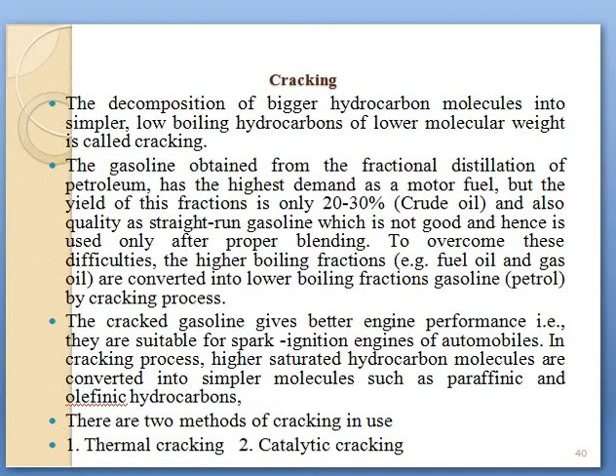So the first one is the thermal cracking. In this process, the heavy oil is subjected to high temperature and pressure. So thermal, high temperature and pressure. The bigger hydrocarbon molecules break down to give smaller molecules of the paraffins, olefins and hydrogen. So bigger groups are giving smaller groups like the paraffins, olefins and lower groups. The cracked products are then separated by fractional distillation.

So the cracked products, whatever you are going to do in the distillation tower, or we call it a bubble tower, or any other means, flashing or anything, we are going to do the distillation. This process is carried out in liquid phase at a temperature of 475 to 530 degrees Celsius, and the pressure is around 100 kg per centimeter square.

This process, where the temperature and pressure are maintained like this, is called liquid phase thermal cracking. When it is done at a higher temperature, 600 to 650, and under a low pressure of 10 to 20 kg per centimeter square, that is called vapor phase thermal cracking. In the first and second, the temperature and pressure vary. In the liquid phase the temperature is less and pressure is more, whereas in the vapor phase the temperature is high and the pressure is low.

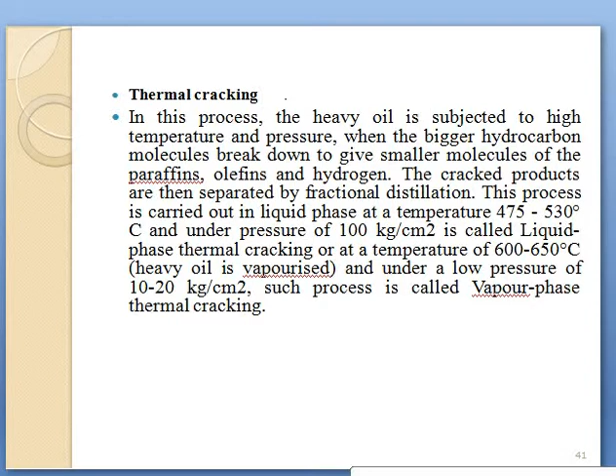So whatever oil you want to crack, we are going to maintain it at high temperature and pressure so that the molecules are broken down. So you are going to heat the feed initially, the heavy oil. You heat it and then it is sent into that column, like our distillation column; we can also call it a fractionator. You are going to fraction pirikka porom tani.

And then you can see that the residue, the heavier things, will be coming down, and the lighter ones, gasoline, will be going to the top. So we can separate each product depending on their density. The residues will be collected at the bottom, and once again from this fractionator we are going to separate them and take out the still lighter gas oil. So in this way we can collect each one as a different fraction.

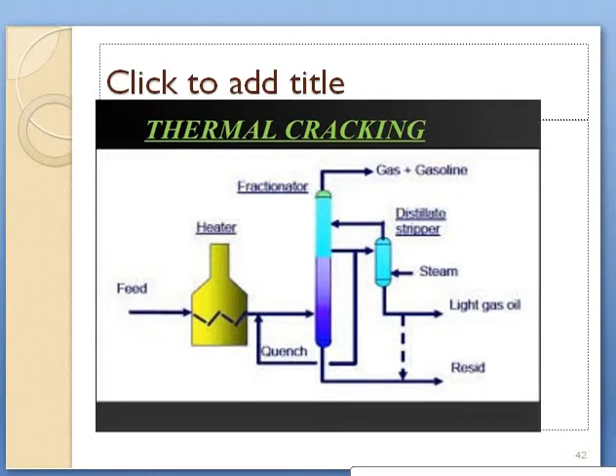So quenching is for that cooling purpose. So thermal cracking, just high heat and pressure will be applied. So next, coming into

catalytic cracking. From the word itself, you can easily understand that in catalytic cracking we are going to make use of some catalyst. In this process, cracking is carried out in the presence of a catalyst at low temperature, around 300 to 450 degrees Celsius, and pressure is very low, only around 1 to 5 kg per centimeter square. The catalyst like aluminum silicate, Al2(SiO3), or alumina used in the cracking gives higher yield and better quality of gasoline.

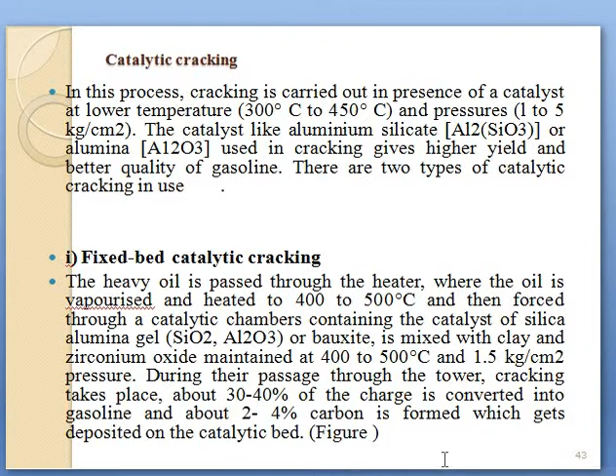So first you are going to get the gasoline, and then we will also have the deposits that are going to be formed, but its content is very less, only 2 to 4%. So cracking takes place, 30 to 40% is converted into gasoline, and 2 to 4% carbon is formed, which will get deposited on the catalytic bed itself. The vapors produced are then passed through the fractionating column.

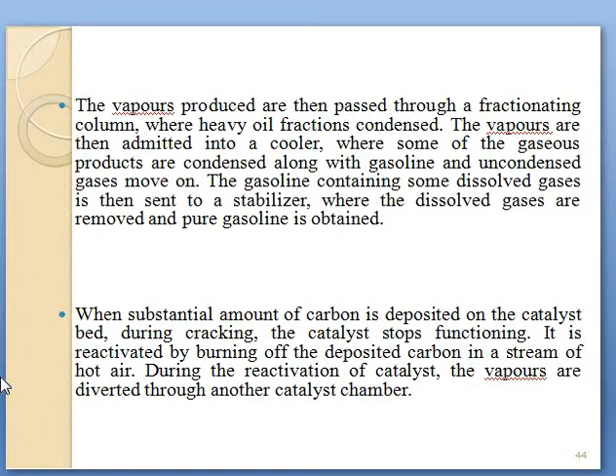It is reactivated by burning off the deposited carbon in a stream of hot air. So you are going to strip it off. If we pass hot air again, you can remove the carbon. So you are going to reactivate the catalyst. During the reactivation of catalyst, the vapors are diverted through another catalyst chamber.

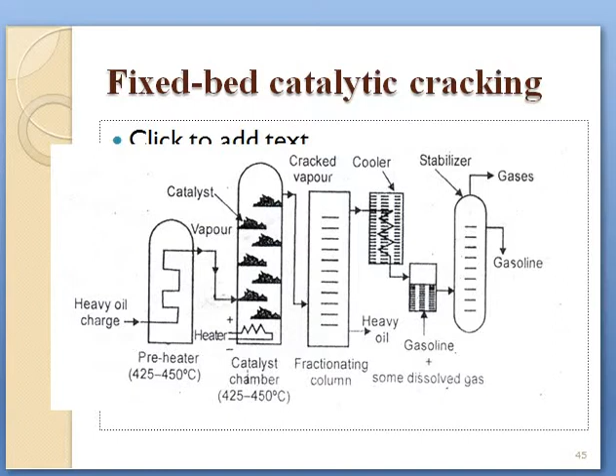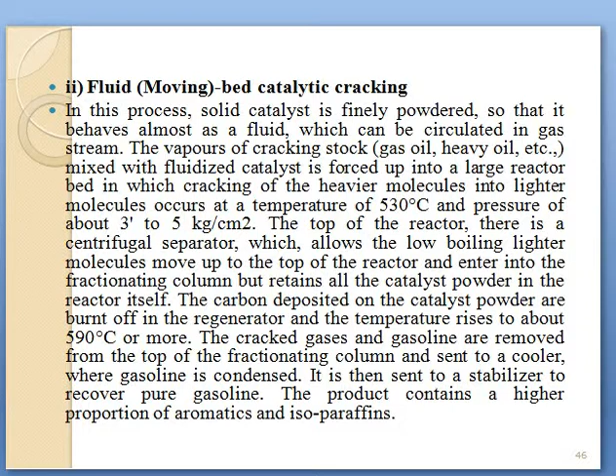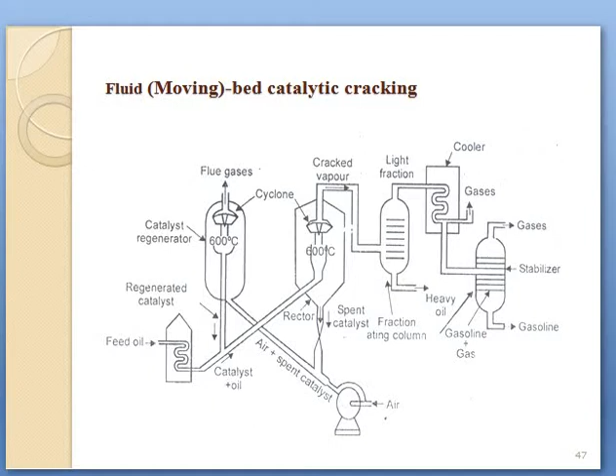Then next is the synthesis of gasoline. So இந்த gasoline நமக்கு வெளியே வருது இல்லையா, so how we are going to change it into the required form. The gasoline obtained from the fractional distillation of the crude petroleum oil is not enough to meet the requirement of the present community due to the vast increase of automobiles.

So அதை அப்படியே நம்மளால யூஸ் பண்ண முடியாது, தேவையான விதத்தில் மாற்ற போகிறோம். Hence an alternate source needs to be found to manufacture synthetic petrol. So synthetic petrol can be manufactured by the process of hydrogenation of coal. The preparation of liquid fuels from solid coal is called the hydrogenation of coal. So that is related to the synthetic petrol.

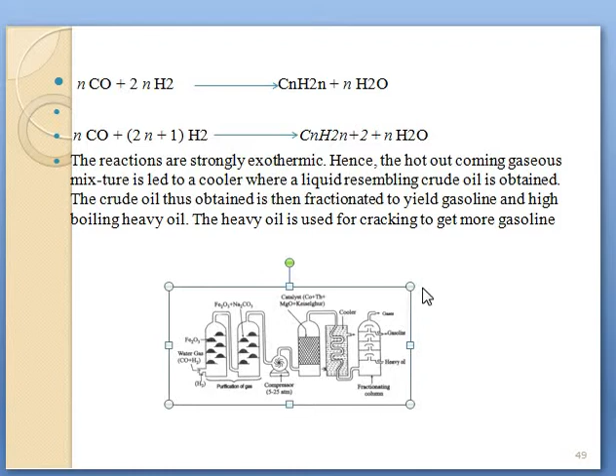Now the gasoline எப்படி நம்ம synthesize பண்ண போறோம்னா there are two processes. One is the Fischer-Tropsch process and the other one is the Bergius process. So coming into this Fischer-Tropsch process, the coal is first converted into coke. Then the water gas. So first, before going into this theory part, have a glance at this diagram. Okay, then we go on with it.

The coal is first converted into coke. Then water gas is produced by the action of steam over the red hot coke. Then it is mixed with hydrogen and the mixture is compressed to 5 to 25 atmospheres. The compressed gases are then led through a converter which is maintained at a temperature of 200 to 300 degrees Celsius.

The converter is provided with a suitable catalyst, consisting of a mixture of 100 parts cobalt, 5 parts thoria, 8 parts magnesia and 200 parts Kieselguhr. A mixture of saturated and unsaturated hydrocarbons occurs as a result of polymerization. So coal first coke ஆக மாத்துறோம். Then the water gas is produced by the action of steam over the red hot coke.

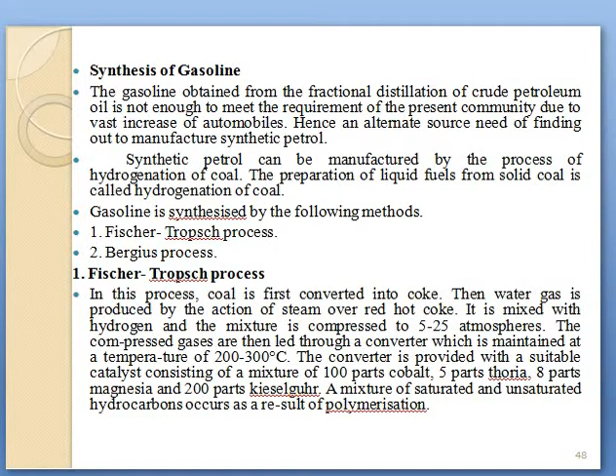The water gas is produced by the action of steam over the red hot coke. It is mixed with hydrogen and the mixture is compressed to 5 to 25 atmospheres. So in the compressed gas, temperature, converter, catalyst இதெல்லாமே இருக்குது. But அதுக்கு முன்னாடி you have to also mention the sodium carbonate and Fe2O3. அதெல்லாம் theoryல இல்லைன்னாலும் you have to mention it. So the thoria, magnesia, Kieselguhr, cobalt, all those things you have to mention properly.

So what is happening? We are having this CO and H2. So it will form depending on the number of molecules. So n CO with H2 gives CnH2n and n water molecules. Then once again n times carbon monoxide will react with hydrogen. So this is one form, this is another form, and you will be getting CnH2n+2 plus nH2O. The reactions are strongly exothermic, hence the hot outcoming gases.

So கண்டிப்பா இந்த high temperatureல வச்சு பண்றோம்னா you will be getting hot gases தான். It is led to a cooler where a liquid resembling crude oil is obtained. So you are going to get a crude oil. The crude oil thus obtained is then fractionated to yield தனித்தனியா gasoline, heavy oil, and gases. So இதுல இருந்து வரதுதான் crude oil. Crude oil தான் petroleum-லயுமே initially we started. So the same thing is being done here also.

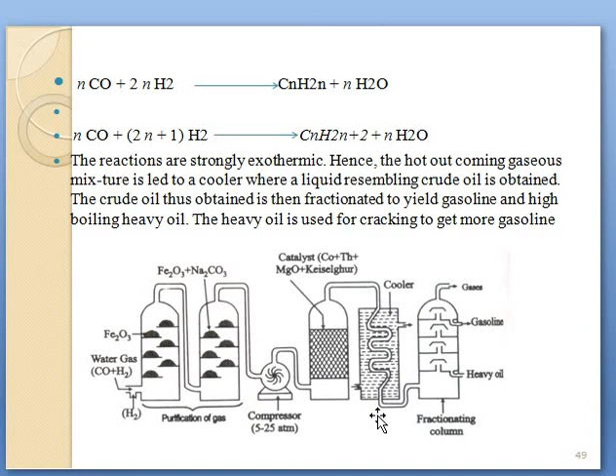So the water gas is treated with hydrogen, then it is passed into the chamber. இது purification of the gas காக. Then it is compressed and passed into a catalyst which is also maintained at high temperature. Then cooling, and condensation takes place. Then you are going to separate it accordingly. Then the last process is the Bergius process.